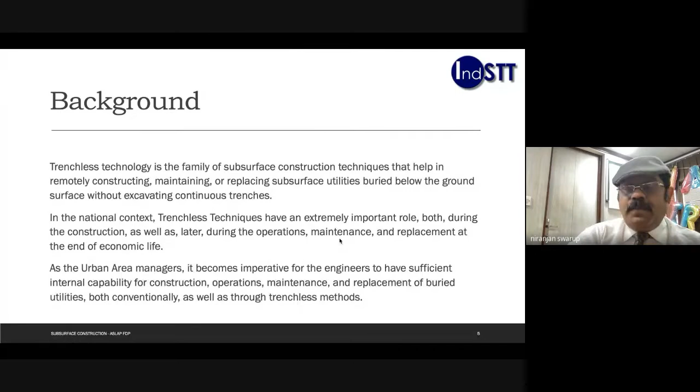In the national context, trenchless techniques have an extremely important role, both during construction as well as later during the operations, maintenance, replacement, and at the end of economic life.

So basically, for the entire life cycle, I have the application of trenchless technology, and we need to understand, or we need to acclimatize our students to adopt those.

As the urban area manager, it becomes imperative for engineers to have sufficient internal capabilities for construction, operations, maintenance, and replacement of buried utilities, both conventionally as well as through trenchless methods.

Through this capacity, the nation would be able to get subsurface utility developed and managed efficiently and effectively. Prerequisite to achieve this capacity is to have proper vision of the application of trenchless technology in the development, maintenance, management of the subsurface utilities, as post-construction management and maintenance of buried utilities through conventional modes may become challenging and even impossible in certain situations.

For capacity creation, we need our academic institutions to see ahead and include systems to cultivate students capable of rendering services for such engineering requirements.

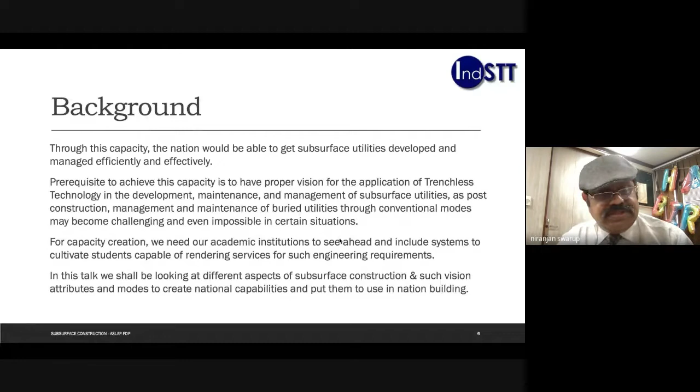In this talk, we shall be looking at different aspects of subsurface construction and such vision attributes and modes to create national capabilities and put them to use in nation building.

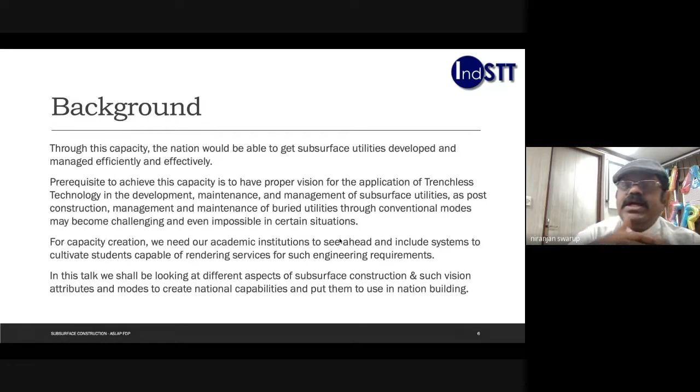So let's move to the basic business. Now, what I'm talking about subsurface space, when I am creating something, the conventional method is to excavate a trench, place my structure or construct my structure, and backfill it.

That basically means I will be damaging my surface, I would be damaging the adjacent structures. Cost and duration of work will be related to the above ground structures and construction. More the denser area, longer the project. Deeper the utility, longer the project.

More utilities buried in the ground, and you have to place your utilities along with them. This brings more complications and a longer, costlier project. Increasing mechanization due to deeper installations is becoming essential today. And if I'm bringing major excavation equipment into a congested city, it becomes impossible to execute.

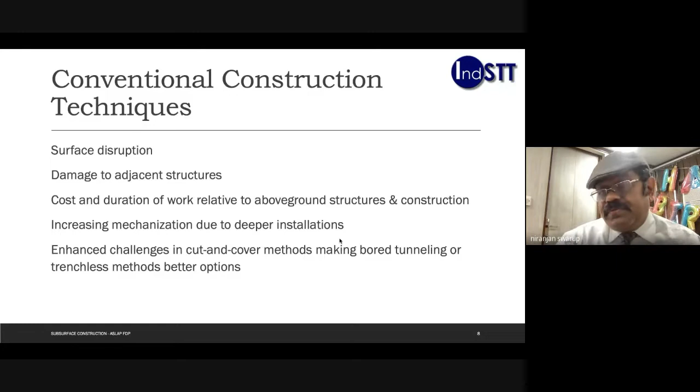These are the conventional construction techniques we face, with enhanced challenges in cut and cover methods, making bored tunneling or trenchless methods the better option. That is what I'm trying to convince all of you, that please think about it, and let's see where my course or curriculum can help my students, or the overall system, apply it.

When I'm talking about a conventional construction method, the problems are that underground space in the public right of way is heavily used. It's extensively used for pipes, cables, everything is buried there. And the traffic congestion is growing exponentially. Every day there are new vehicles sold in India, and those vehicles are going to land up on the urban roads.

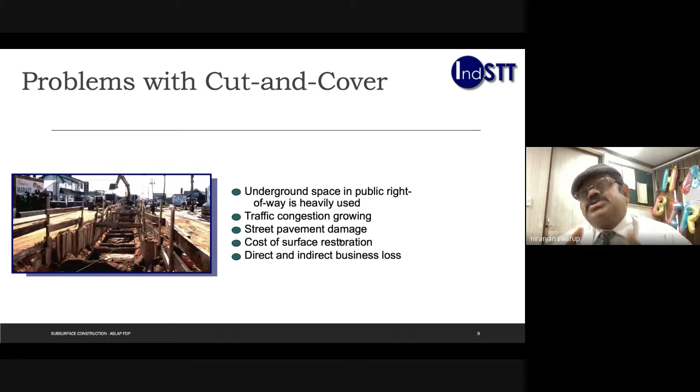The street pavement damages occur when we are talking about excavation. The cost of surface restoration goes up every time, and direct and indirect business losses do come when we are excavating.

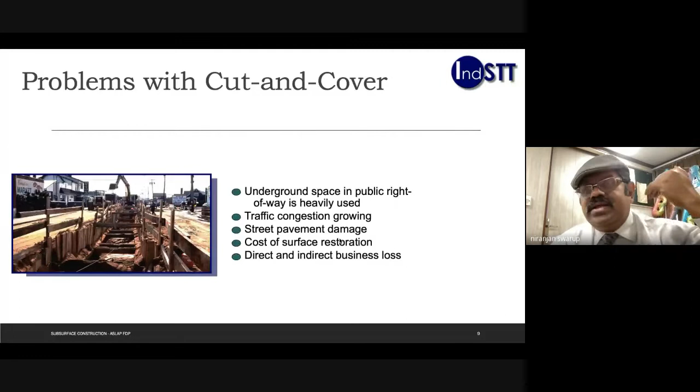So this happens when I'm creating a new utility or new infrastructure, in urban areas or even in cross-country structures where we are constructing pipelines connecting, say, Godavari to Jamnagar. There's a major pipeline connecting the Reliance refinery to the Godavari catchment area, and all those require use of trenchless technology in a big way.

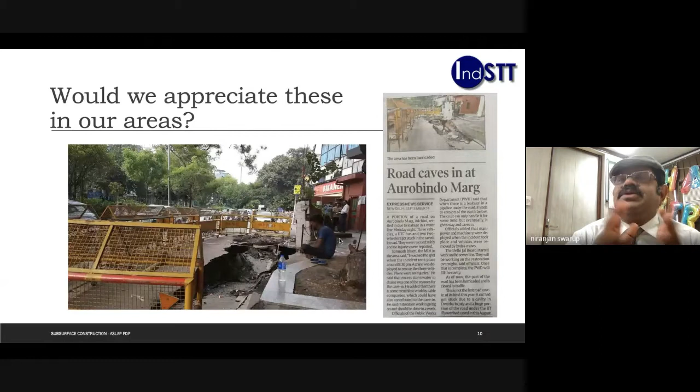Now, I have created my utilities. Then what? Does my utility survive forever? No. This is a picture from Aurobindo Marg last year. You can see the road caved in because of the failure of the pipeline, and the whole structure went down.

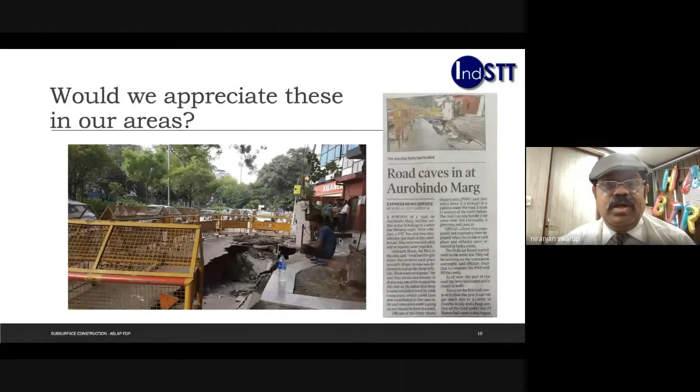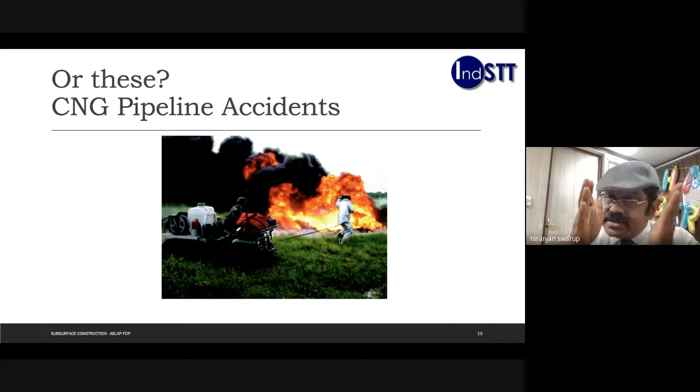And this is something which has now happened a few times, because we are burying CNG or natural gas pipelines all around the city. City gas distribution networks are being created, and this kind of accident is becoming reality now.

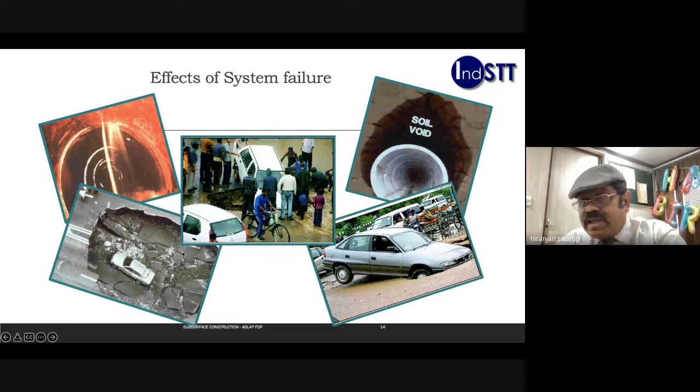Now, what actually happens when you have a buried utility: it will start malfunctioning, and that malfunction will basically create cavities around the utility. When that cavity becomes huge, the load on the surface will basically compact, and the road will cave in, or the structure will cave in, and the roads and everything will go off.

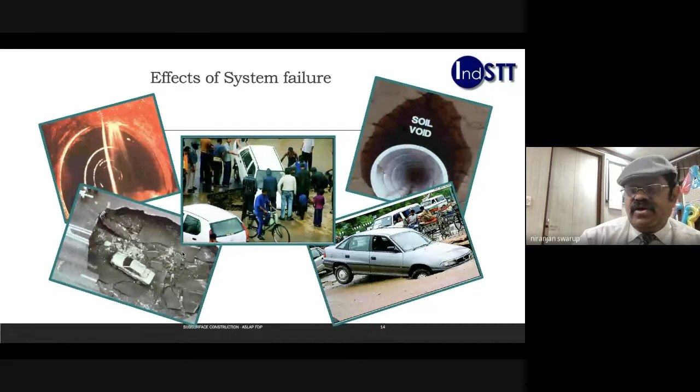So what is needed, or what would be the situation then? The situation would be that we will have to go and repair or rectify all this. So please decide: do we want our subsurface infrastructure built to serve us, or do we continue serving it by creating or repairing it and the appurtenant infrastructure continuously?

Naturally, as an engineer, I would never prefer the second part. I would like my subsurface infrastructure to serve us, and that basically requires application of engineering.

For creating new subsurface infrastructure, we need construction methodologies that reduce open cuts and surface damages while building robust structures. For rehabilitating or repairing subsurface infrastructure, we need construction methodologies that help in using the old subsurface alignment.

When I have used a space, I need to retain that space for the usage of that particular pipeline. That way, any other pipeline can be laid at some other place. In case I don't retain that space, I'll be putting another pipe at another location, and two spaces would be wasted in the subsurface region.

Remember one thing: once you have laid the utility, the next level of utility will be coming below that, then below that, then below that, because the younger the utility, the deeper it has to go.

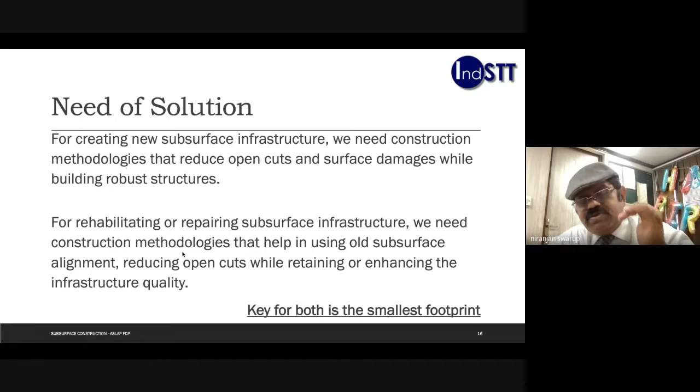And mind it, there are certain services, when we're talking about smart cities or even normal cities, where the levels are frozen because you have discharge locations frozen. So it becomes imperative that you retain the same location. So basically I need methodologies that help in using the old alignments, reducing open cuts while retaining or enhancing the infrastructure quality.

Key to both of these is the smallest footprint, and that is what we achieve through trenchless technology. So let's discuss trenchless technology.

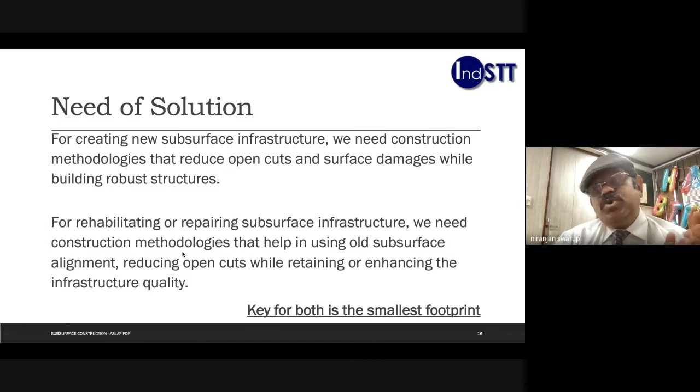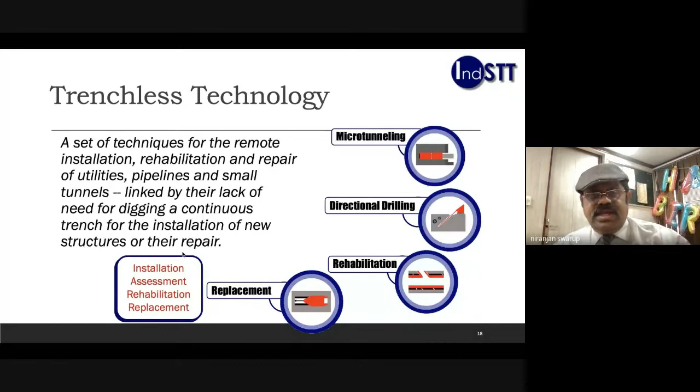It is a set of techniques for the remote installation, rehabilitation, and repair of utilities, pipelines, and small tunnels, linked by their lack of need for digging a continuous trench for the installation of new structures or their repair. So basically, what I do is create a cavity in the ground, or maintain a cavity in the ground, and by creating that cavity, I render certain services to the consumer or to the catchment area, the inhabitants.

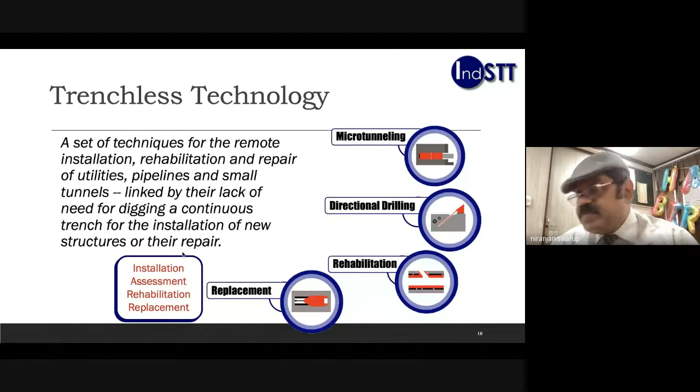So basically, when I'm talking about Trenchless technology, it comprises of 4 branches or fields. One is new installation, second is rehabilitation, third is replacement, and then since we are working in the ground without excavating continuous trenches, we need to see through the ground. That is the 4th segment, where I'm seeing through the ground using certain engineering inputs. These are basically the 4 primary legs of Trenchless technology, which we apply. Now let's look at these legs one by one.

When I'm talking about new installation techniques, what I mean to say is I'm creating a cavity in the ground. I can do this by shifting the soil sideways, I can cut the soil and actually remove it, or I can do fluid assisted boring, where a fluid or a mechanical device cuts and breaks the ground, and the excavated material is removed by the circulating fluid. So these are primarily 3 major cavity creating methodologies, and that understanding will help us see where we can apply the basic engineering in this.

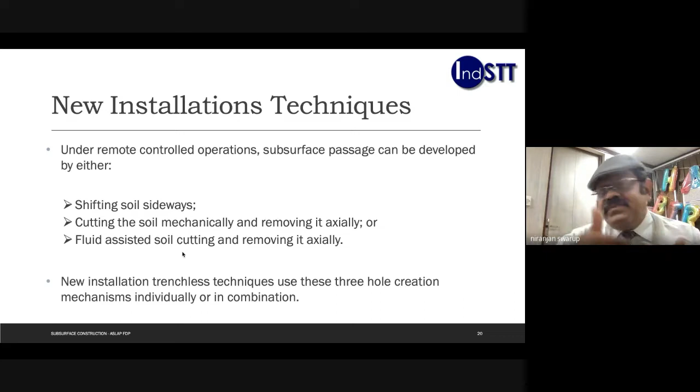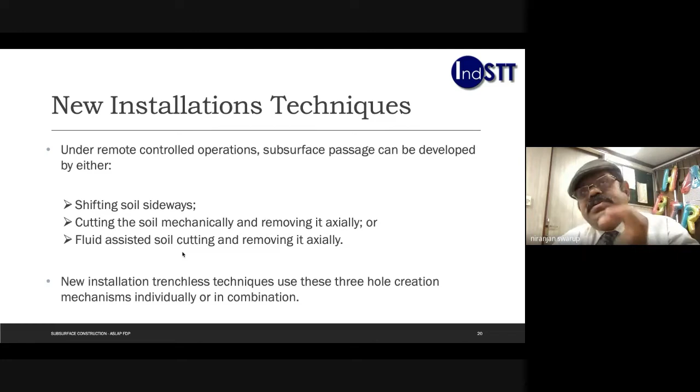So now we created the cavity. The cavity on its own will not survive, we need to provide some wall, and that wall is basically the pipe or structure which we are placing there. This pipe or structure would be deteriorating over a period of time, and I need to arrest its failure process. So what would I do? I would basically plug the leaks in the beginning, as we see that if the leaks are there, it will permit the soil to cave in or get inside the pipe, and it will in turn damage the whole surface.

So I will plug the leak, or the second stage of the damage would be where I would be inserting a leak-proof membrane which prevents the fluid from flowing in, but does not give any structural strength to my pipe or structure. The third one, where my structure has become completely weak, I would be inserting a load-bearing liner which will take the load and retain the whole space. So these are the three primary rehabilitation modes on which different methodologies are created and applied.

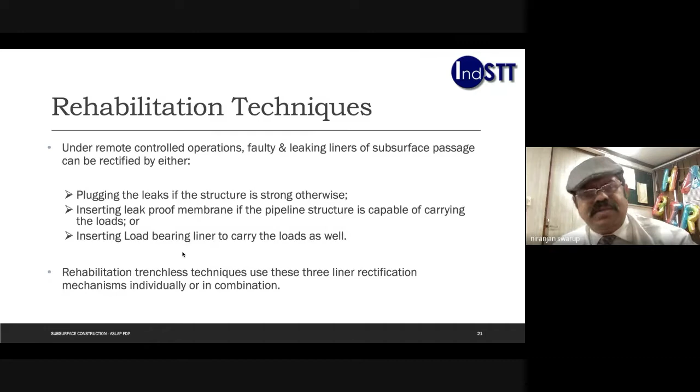There are many methodologies and methods in all of these systems, and they are developed to suit a specific need or requirement. If I'm talking about any place or any utility which has alignment and grade control, there are specific equipment and methodologies which have to be used so that the structures are robust and usable.

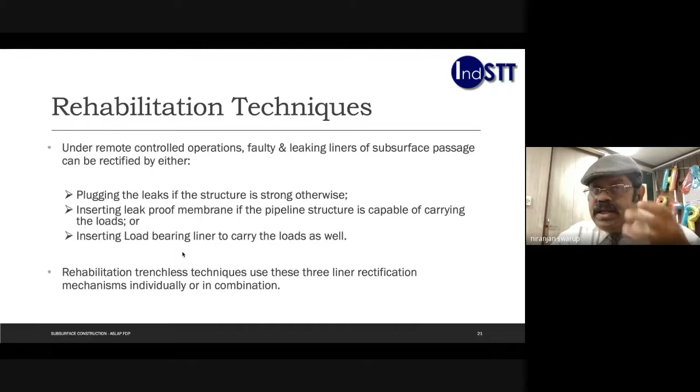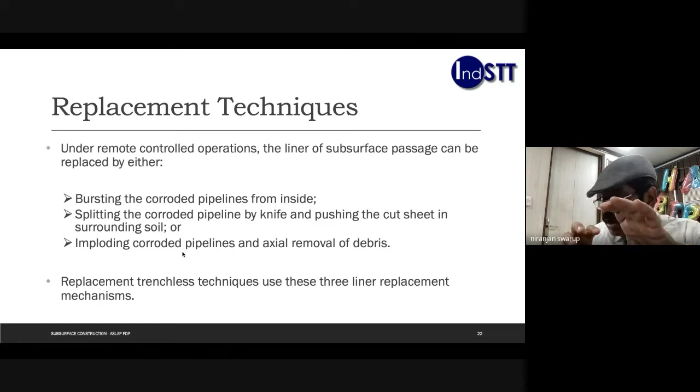Now, I did rehabilitation. The last stage would be where the utility is unable to survive, and it would become more practical if I replace the liner. How do I replace that? I burst the corroded liner from inside. I insert a cone, and that cone has a larger diameter than the existing pipe. So it crushes the pipe, and the pipe is pushed out, and the cavity space created behind it is filled up by the new pipe being pulled in.

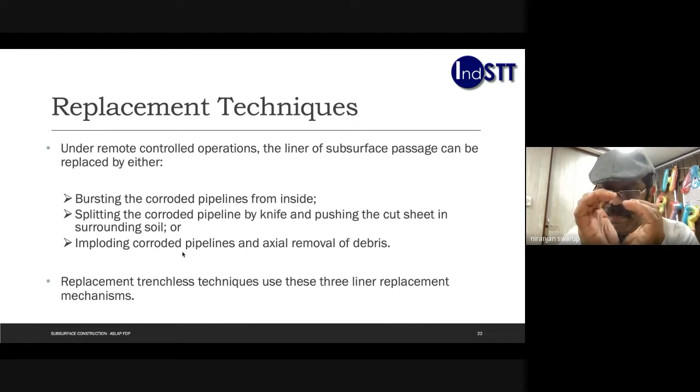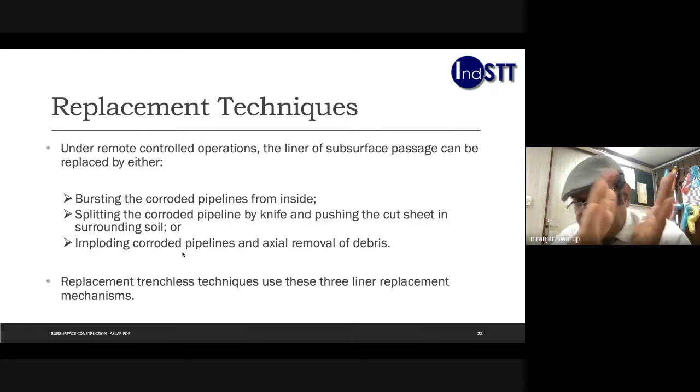Or I can run a knife through it. The knife will cut the pipe, and naturally behind it, the new pipe will be pulled in. This is done generally for the metallic pipes which are ductile, and cracking them is not easy. Or I can do imploding, where I practically break the pipe and remove the material axially. So these are the three primary pipe replacement methodologies by which I can remove a buried pipe and place a new pipe therein and use it continuously.

Now, then comes seeing through the ground. This means that under remote controlled operation, the subsurface information has to be gathered. If it is not available, there is a chance that we may go and damage or destroy the existing structures. To avoid that, we require the status of the buried pipeline, the status of the geophysical facts in the ground, and the pipeline condition information.

Now, status of the buried pipeline means that you would find out at what location, at what XYZ coordinates, the pipeline structure is existing. That is done by applying certain geophysical methodologies, and in addition, certain protocols called subsurface utility engineering help you identify and designate a specific pipe where it is buried, and based on that information, the works are done.

Then comes the geophysical information, where you need to know what is the soil strata, what is the quality of soil, based on which you will select the equipment, you will select the fluids or cutting liquids, and you will select the other complements like downhole tools and everything.

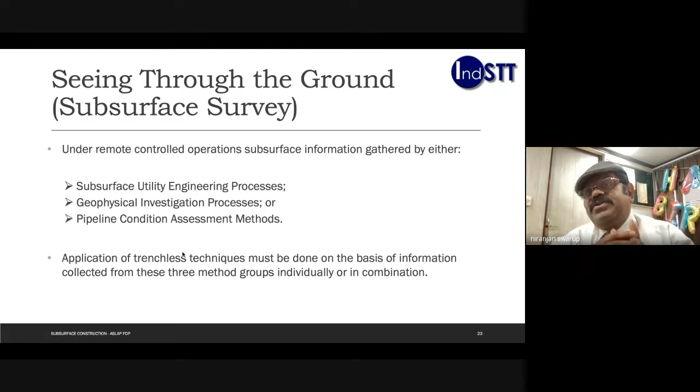So application of trenchless techniques must be done based on information gathered from these three segments. The first two refer to new installation. The third refers to pipeline condition assessment, which relates to rehabilitation and replacement of pipelines. In isolation or in combination, these methodologies are applied to see through the ground, or subsurface survey is done.

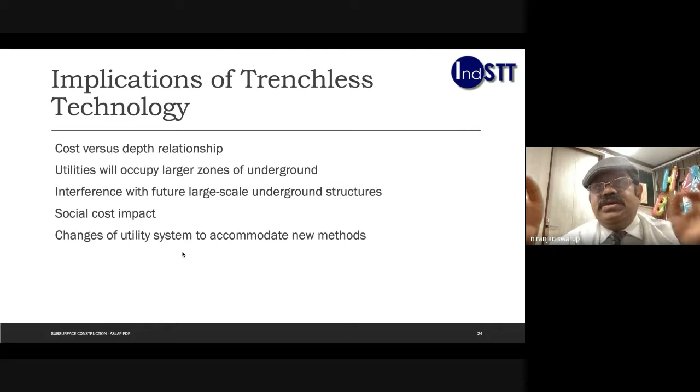Now the implications are, as I indicated, the deeper you go, the cost goes up, the time goes up, your damages go up — all those things when going for open cut excavation. But when using trenchless technology, your entry location is defined, your exit location is defined, and the other sections are not excavated. So your cost is not very connected with the existing depth. You can lay the pipe at one depth or another depth and probably end up with the same cost and same timeline.

Now remember, when we talk about trenchless technology, we are avoiding all the buried utilities. We know this by running the subsurface utility engineering protocol, which tells us where pipelines, cables, or structures are buried, and defines where we can lay our new pipes or structures. That is helpful if I'm going for trenchless technology. If I don't, I need to excavate everything, expose everything, and risk damaging them.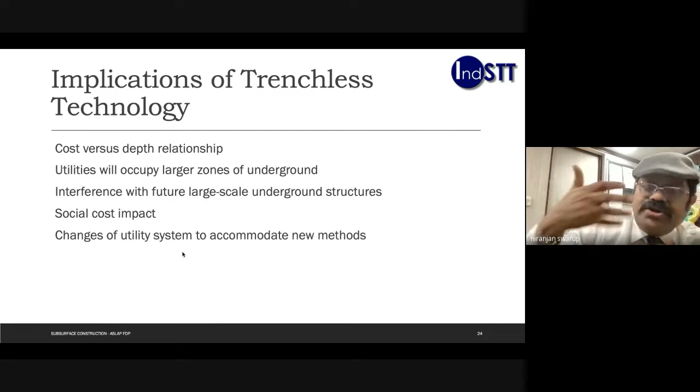Then comes large scale structures in future. Let's say you build one tunnel in the city, and tomorrow you want to build another tunnel below that. There would be challenges, because when the second tunnel is built at that level, the first tunnel could be destroyed or damaged. This also is avoided by trenchless technology.

Then comes social cost impact. If you're applying trenchless technology, you are not damaging anything on the surface for most of the project length, so the social cost is the least. If you are excavating a trench on the road, naturally there will be diversions, losses of business, gases and excavated material — like parali burning brings Delhi a very bad gas chamber situation. All those can be avoided if you go for trenchless technology.

And then you can change the utility systems to accommodate new methods, especially when building smart cities — you require sensors to be placed, you require Internet of Things, and those inputs are very easily achieved by trenchless technology application. Most smart cities are utilizing trenchless technology, and I'm trying to convince all of you that please train your students in these fields so that boys and girls get engagement with those smart city SPVs or their contractors. And mind it, this business is going to survive till the smart city survives, so obviously it's a long-term goal.

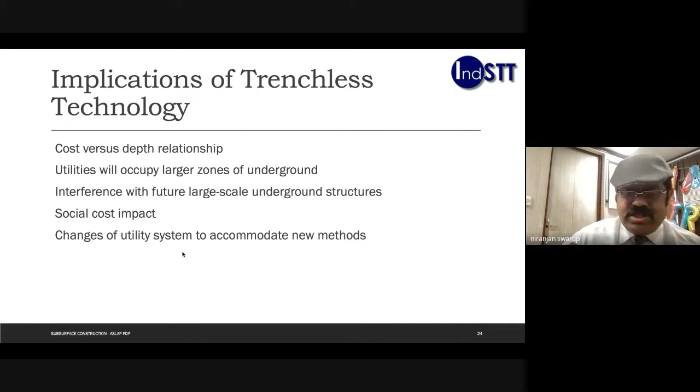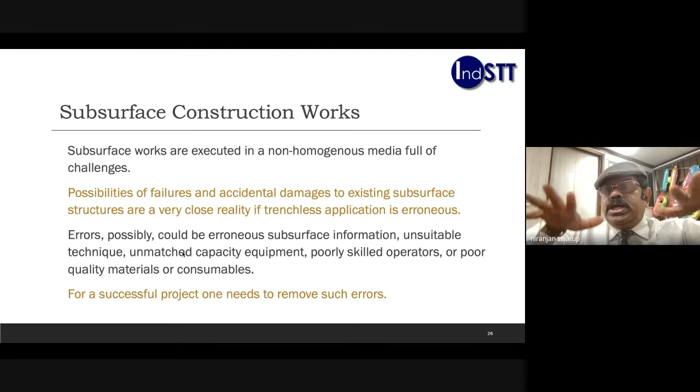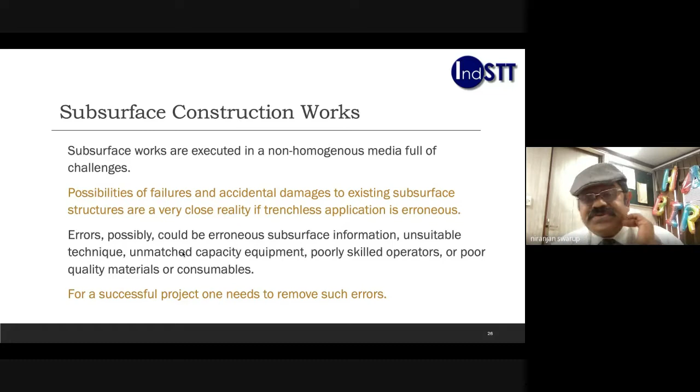So let's look at subsurface constructions, the engineering part. The subsurface works are executed in a non-homogeneous media full of challenges. Possibilities of failures and accidental damages to existing subsurface structures are a very close reality if trenchless application is erroneous. Errors possibly could be erroneous subsurface information, unsuitable technique, unmatched capacity equipment, poorly skilled operators, or poor quality material or consumables. For a successful project, one needs to remove such errors, and that is where the role of the professor comes in.

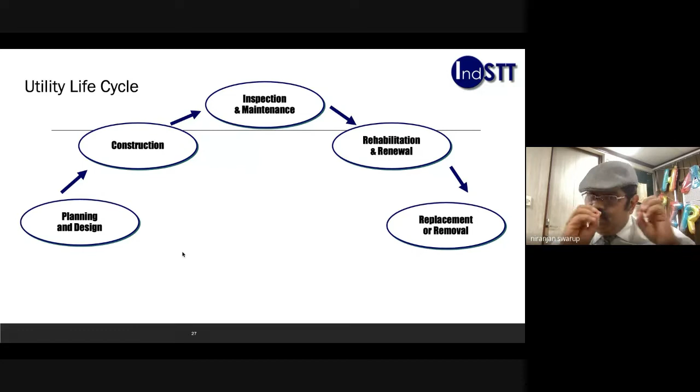Let's look briefly at the life cycle of a utility. You plan and design, you construct, you inspect and maintain, you rehabilitate or renew, and then you replace or remove. So if I look at that, it will be new installation, rehabilitation and replacement, seeing through the ground, and life cycle data management — these are the four pillars on which this whole utility life cycle survives.

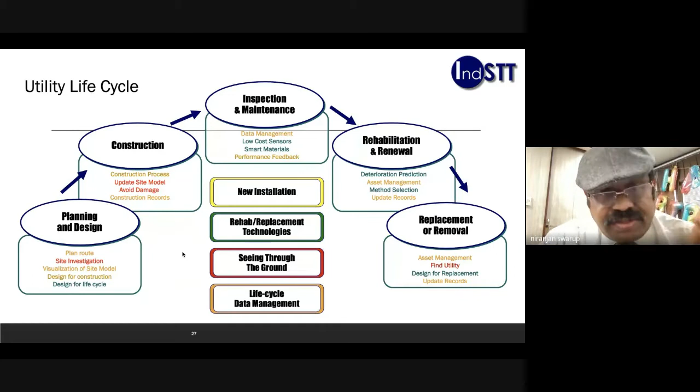When you're planning, you plan the route, do the site investigation, visualize the site model, design for construction, and design for the life cycle. When you are constructing, it's the construction process, updating the site model made in the previous stage, avoiding damages, and creating construction records — those should be ABD, as-built drawings. Then comes inspection and maintenance, where the data is managed, the ABDs, the quality of material, the joints and everything are defined.

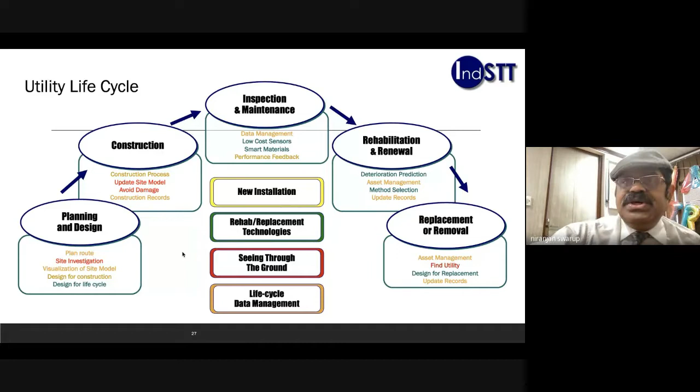You have low-cost sensors installed, you have smart materials which work based on the need, and then there's performance feedback that comes in saying this pipeline is going to fail over a period of 2 years, so get your things rectified now. That kind of proactive approach is quite essential for smart cities, and obviously our engineers have to be trained accordingly.

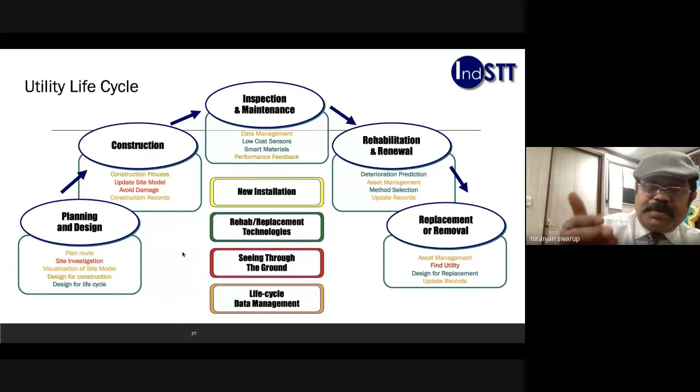Then comes rehabilitation and renewal, where the deterioration prediction is done. You do the asset management, select a specific method for how you are going to rectify the failures or the rehabilitation jobs, and then update the records, because the moment you strengthen it, its quality would go up, and that would supersede your construction records made in the second stage.

When the utility is at the end of its life, you do the management like finding the utilities, because you would be aware that if you go around any urban area, the utilities built 10 or 20 years back are already buried below the ground and more structures have been built over it. Finding those utilities itself is a challenge. So finding utilities, design for replacement, and updating the record.

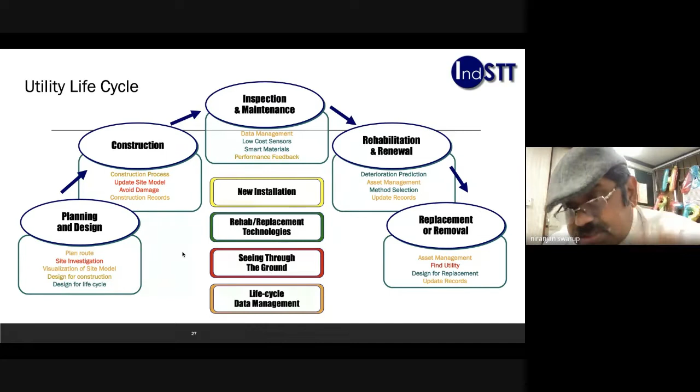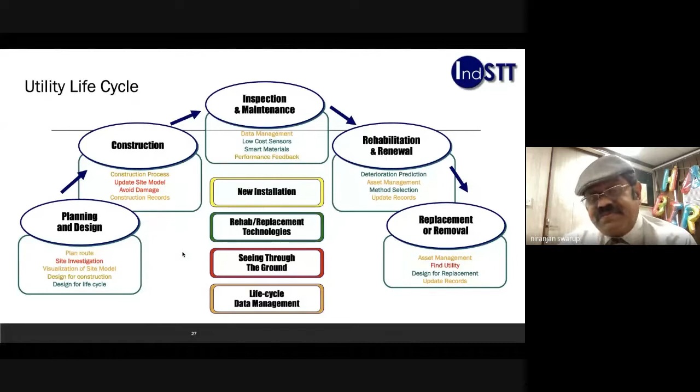So these are all part of the activities which somebody managing or constructing subsurface infrastructure has to perform. Please think about your line of business. If you are a computer engineer, or you are teaching somebody computer science, there are codes you can write for any of these activities, and systems you can develop for data management, data gathering, designation.

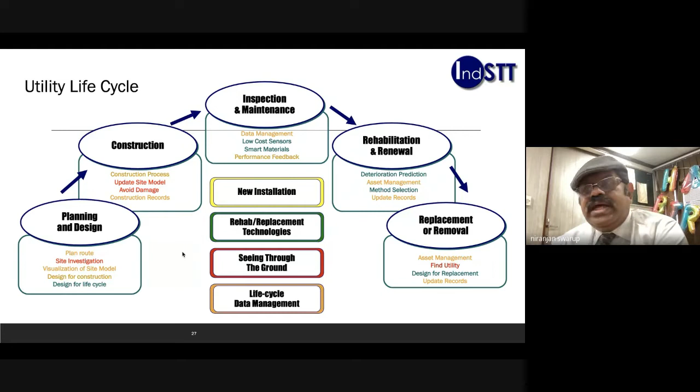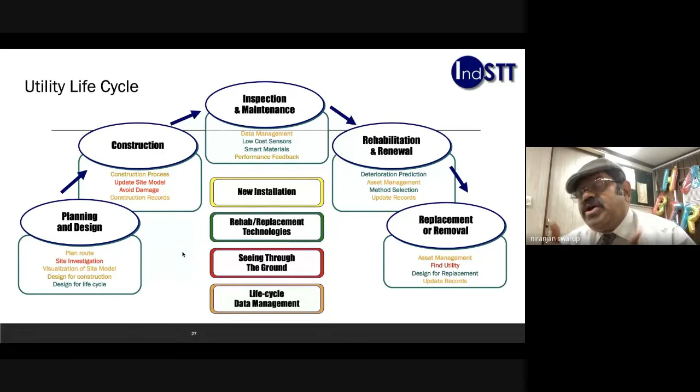There's, let's say, a CCTV camera. Once it is running inside a city like Delhi, the pipelines created here are more than 9,000 kilometers if I add everything in one place. So now 9,000 kilometers of data is huge data which has to be managed or understood, so that failures are avoided at the latest stage of its operation. So all those things come in.

You think of your branch, and there is a major role of that particular branch in this field.

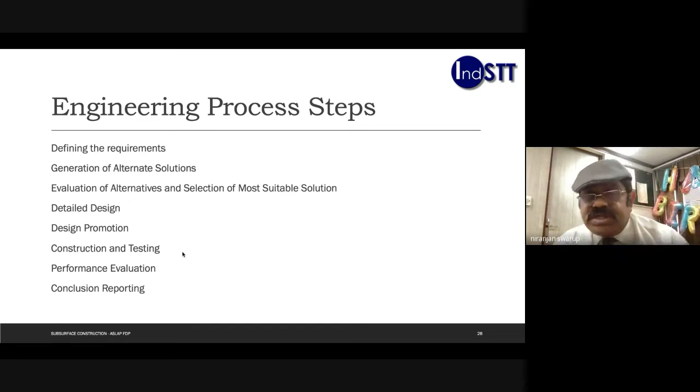Now, what is the engineering process generally applied? You define the requirement, generate alternative solutions, evaluate the alternatives and select the most suitable solution, perform the detailed design, promote the design so that it is accepted or approved, construct and test, performance evaluation is done, and then finally conclusion reporting. So this is the basic engineering process of this life cycle we are talking about.

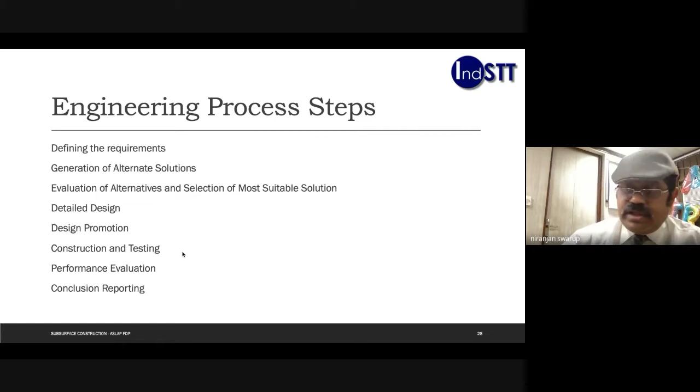Now what happens here is there are geotechnical issues which cloud the subsurface construction. It is a challenging business, and that is why we require educated boys and girls who can understand the primary challenges. The jobs are uncertain.

If you are aware, in Kolkata, in Bowbazar, the Kolkata Metro was laying the line, and the machine, which was about 6 meter diameter, punctured a water body, and the water flooded the whole tunnel. It was a catastrophic problem. So all those things give uncertainty to the business, and that is a very expected thing.

And here comes the decision-making skills of our engineers, who can really understand that if they are applying something, what could be the outcome. The conditions which have been defined could change, because that water body, in the example I gave you, was not known. In the contract, they thought it was solid soil, and they just went on tunneling, and then they got the water.

You need appropriate expertise and timing, because these are processes where you are creating utilities below the ground. You have to do non-stop working. The moment you stop it, the project will go into suspension, and if the project stops, inertia is going to spoil the whole process. So you have to have proper expertise in the whole process, number one, and then run it in a way that the project is successfully concluded.

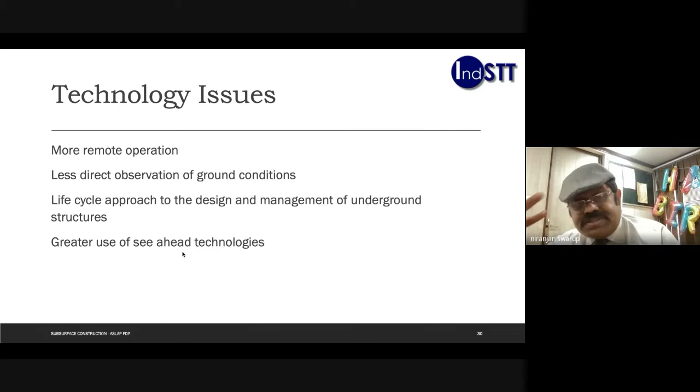Subsurface construction and trenchless. Trenchless technology applications are remotely operated, smart construction processes that are extremely useful for creating, maintaining, and managing subsurface utilities without excavating continuous trenches. Through this feature, surface and subsurface infrastructure destruction in urban areas can be avoided during construction. In addition, positioning processes and systems of these techniques help in creating a correct as-built database of the buried utilities, providing valuable inputs for future maintenance works of the subsurface utilities.

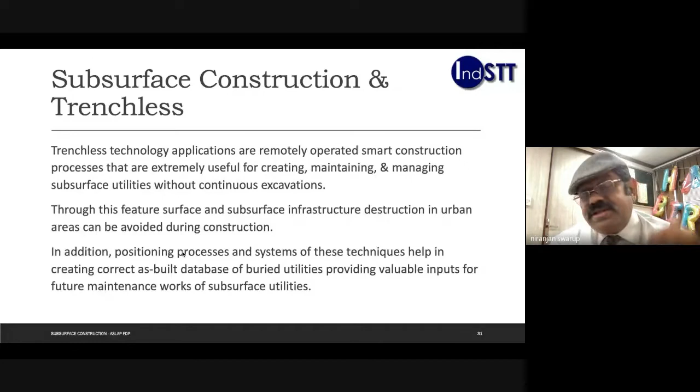That Internet of Things, which I'm speaking of for smart cities, is created from this information. Utilities like water supply, drainage, power and telecom lines, petrochemical and gas transmission and distribution networks are commonly buried below the ground surface. Historically, these have been laid by conventional open-cut processes. With enhanced density of subsurface networks, trenchless techniques are becoming the preferred construction process, because you cannot go on excavating open cuts, open trenches and laying your utilities forever. There will be a limitation when your existing pipelines come.

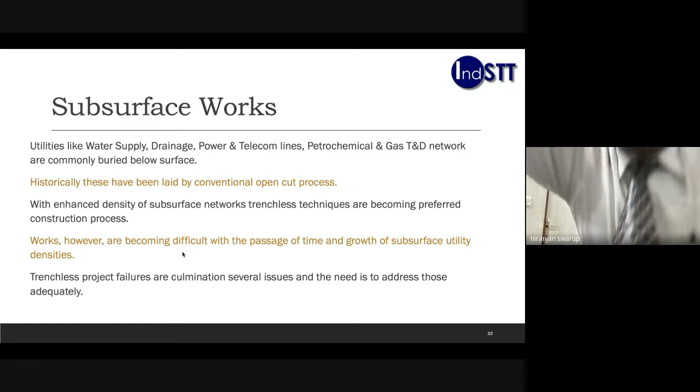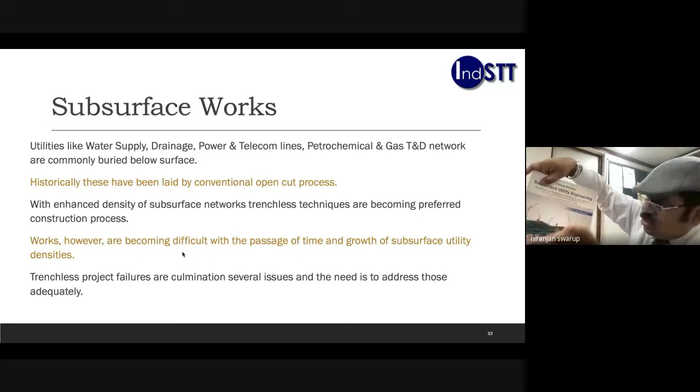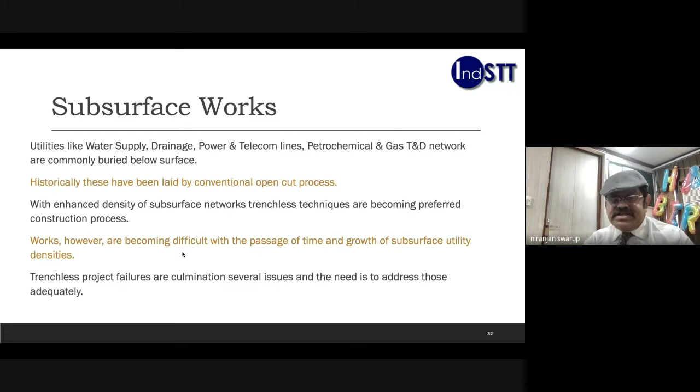You can look at the brochure of one of the programs that we conducted. You can see these are the electrical poles on the road and these are the utilities buried below the ground. Now, if you have to lay another utility below it, it will be a bigger challenge. So anyway, this is something which has to be addressed. Works, however, are becoming difficult with the passage of time and growth of subsurface utility densities. Trenchless project failures are a culmination of several issues, and the need is to address those adequately.

Now, let's look at the anatomy of failure. The failure can happen if I select an inadequate or improper technique. There are several trenchless techniques, and you can choose any of them. But if it is not suitable, you will end up in a failure. Inadequate site and/or soil investigations. Inaccurate subsurface interpretation. You will be running, let's say, ground penetrating radar. Now, this radar sends radio frequency signals down, which get reflected, and this passage is measured in nanoseconds or whatever the units may be.

Now, this time lag will depend on the dielectric constant or different characteristics of your soil, and that will alter the depth measured, or give you erroneous depth. So subsurface interpretation is something which has to be very clear, and the boys and girls have to know that. Unforeseen ground conditions are there because, as I explained previously, another possibility is that while you are creating a cavity, you go and get inside the existing pipeline.

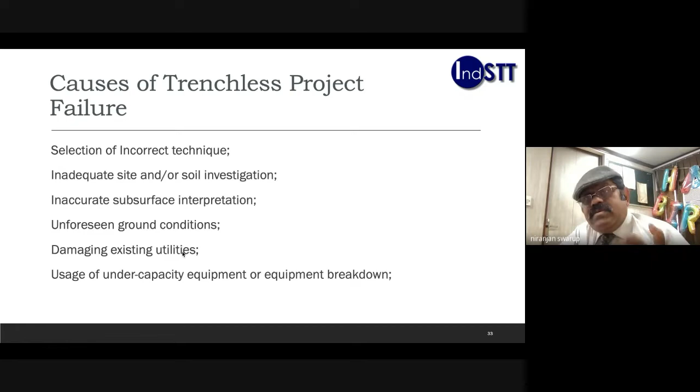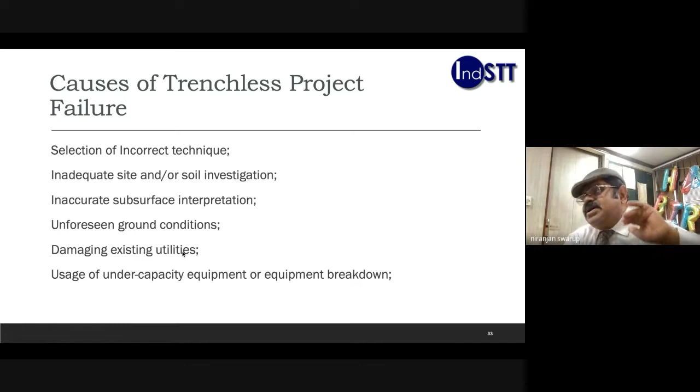There has been a case during the Commonwealth Games in New Delhi in which one pipeline on one road was collapsing one by one. In one month, it collapsed 10 times, because the people who were laying HDD lines were simply drilling through the sewer line, creating a hole, putting their cables and going away. Later, when the monsoon came, because of the water pressure, the pipeline collapsed at one location after another. This went on happening. That ended up with the utility having to be excavated and repaired everywhere.

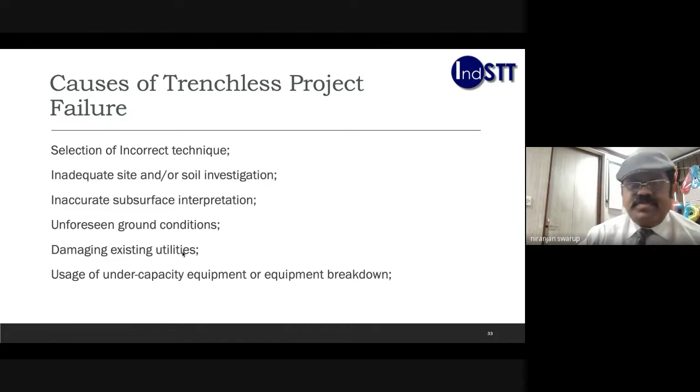Usage of under-capacity equipment or equipment breakdown. These are something which we need to cultivate in our boys and girls, that they have to understand the project requirement and based on that select the proper equipment. Inadequate temporary works. When I'm doing my project work, there are primary needs of temporary works, and if I don't do them properly, the project can fail. Installation of inappropriate or weak materials. It's a very understandable statement. Failure to adhere to the work or material specifications.

There are specifications which have been created for trenchless technology. IndSTT has published those. I've been the secretary for the code formation committee, and we have published 7 codes. We expect to release another code in April when we hold the NoDig India conference on 8th April. So that will be the 8th code coming in. And then finally, inappropriate or bad workmanship. If the proper work is not done, and you allow bad or unskilled operators to run the machine, you are going to end up in a troubled project.

Mind it, a tunnel boring machine, a TBM, requires specialists or operators who are having a master's degree in engineering. MTechs are generally employed for running the TBMs. The BTechs generally are taken in for installing, or rather, smaller machines. So that is the level of information and level of knowledge which is needed.

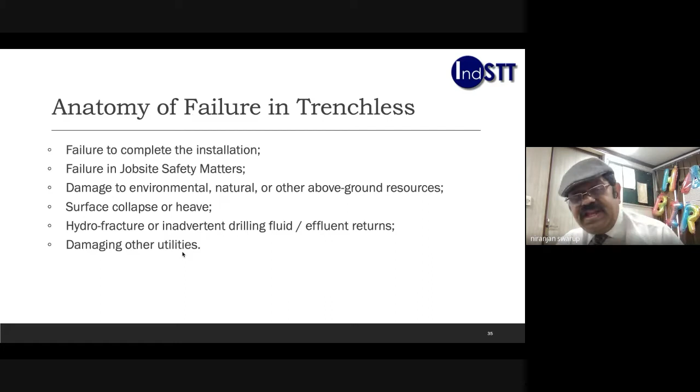And what are the reasons behind it? When I'm drilling, there is a fluid which I'm pumping in, and that fluid is lost. The fluid will not be bringing anything back, and the pipeline will collapse. There can be obstructions in front of it. There can be hydrolock, where pressures are getting created. So we need to design the fluid in a way that hydrolocks are not created. Line and grade failures are there.

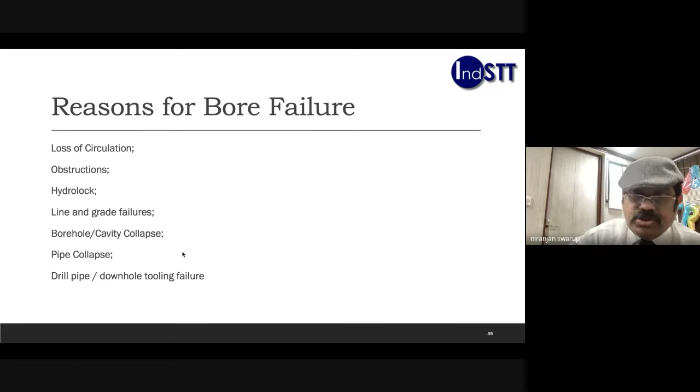Let's say I have to create a pipeline at a specific depth and alignment. I apply a machine which is not capable of doing that. The result would be a pipeline created like this, and it won't drain off anything if you want a gravity flow pipeline. You can have borehole or cavity collapse. You can have pipe collapse. You can have drill pipe or downhole tooling failure. So all those things lead to more failures.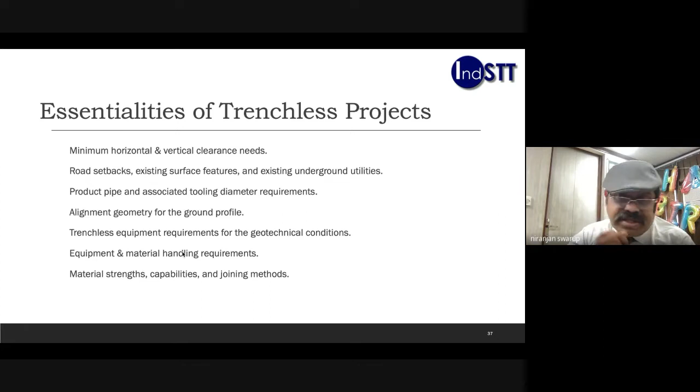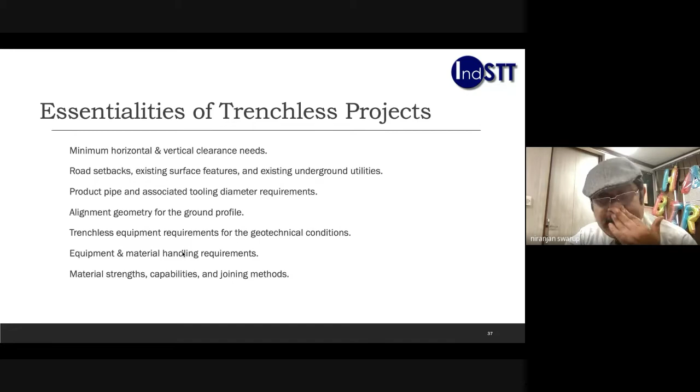The product pipe and associated tooling diameter requirements have to be understood. Alignment geometry for the ground profile has to be known. Trenchless equipment requirements for the geotechnical conditions need to be understood, and based on that understanding, the equipment has to be sourced or applied at the site. Equipment and material handling requirements have to be defined, and material strengths, capabilities, and joining methods. All these things require understanding of various engineering fields. We have to have that understanding in our boys and girls.

The critical inputs for a trenchless project are trenchless attributes, required attributes of the executing agency, technology selection, execution plans, third-party inspection, challenges in new installations, liners, and pipe bursting. So these are the critical inputs which are essential, which have to be understood if my project has to succeed.

Attributes of trenchless means these are basically specialized in nature. These are not run-of-the-mill works. The technique selection has to be very clear and precise so that you don't end up creating a poorly constructed or poorly repaired utility. Operator skills are an essential part of it, where your role comes in. You have to be teaching your boys and girls how to do the planning, the design, the execution, the reporting, and the as-built drawing preparation. So all those things do come in.

You have to have suitable equipment meeting the project and site requirements. The installed materials have to be properly selected. Technique-related limitations are always there, and every limitation has to be understood, and based on that, decisions have to be taken. Proper subsurface data is one of the essentialities. And finally, the impact of surrounding structures also has an effect. Let's say you are working close to a retaining wall. This can make your job challenging. So all those things have to be understood by the boys and girls.

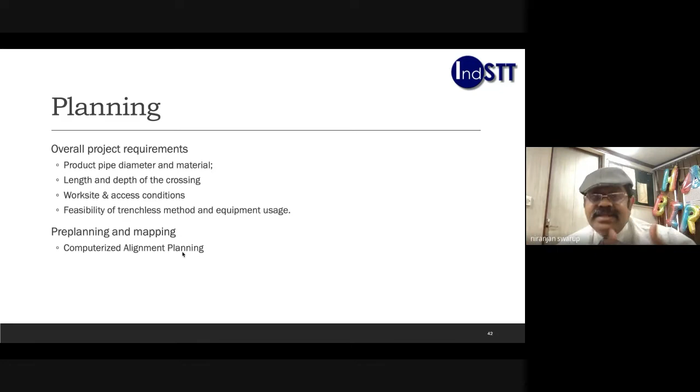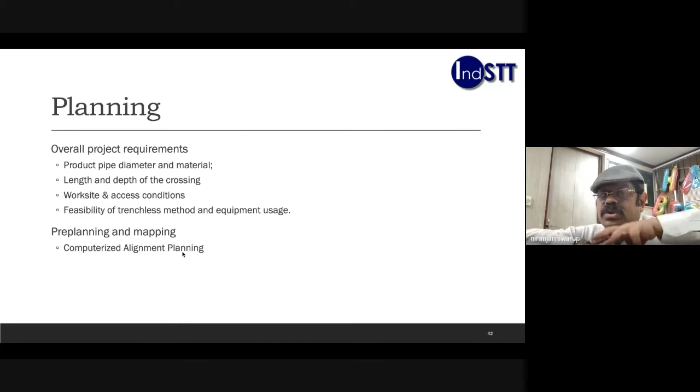When I'm talking about planning, planning means I need to understand the overall project requirement, product pipe, diameter and material, length and depth of the crossing, work site and access conditions, feasibility of trenchless method and equipment usage. Then comes pre-planning and mapping, where I will do the computerized alignment planning. How am I going to lay my structure?

When I'm talking about job site safety, it depends on the operator skills, safety, health and environment issues, job site inspection and briefings, overhead structures, underground structures and appurtenances, trenchless and allied equipment safety, and electrical strikes. Because we are working below the ground, there are chances that my machine can go and hit a power cable or a gas line or anything. So those are the job site safety issues which my boys and girls have to know.

Directions for project planning and execution. The basic trenchless project considerations have to be inculcated within them. The pipe path alignment considerations have to be told. Directional accuracy and tolerances evaluation, they should know. The product pipe considerations, what are to be used, that they should know. The stress considerations they should know, and as-built drawing considerations are another essentiality.

When I'm talking about performance standards: equipment operations, safety during the work, working drawings and sketches, compliant execution. Whatever we have drawn, the installation or construction has to follow that particular methodology and the drawings and the directions. Appropriate use of equipment and tooling, machine operating procedures and sequencing, meeting the minimum qualifying competency standards for the operators. So these standards are there.

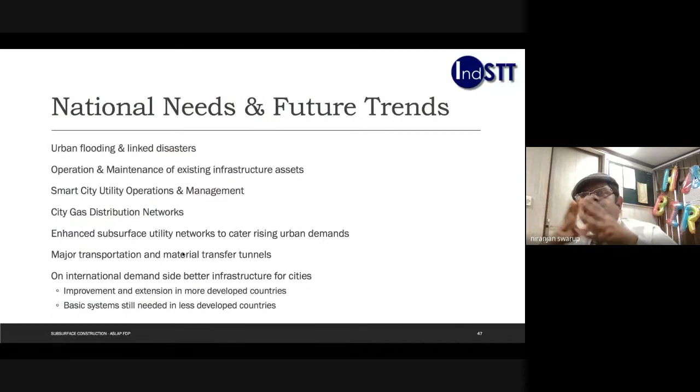Then comes the international market. Most of the developing nations are now applying trenchless technology, and the boys and girls who were trained under IndSTT, many of them are now serving international markets. I would propose to enhance this overseas job-getting situation. Please think about your students - if they are able to get some employment in Philippines, some employment in Saudi, some employment in Africa, South Africa and so on, they would be having a very good life.

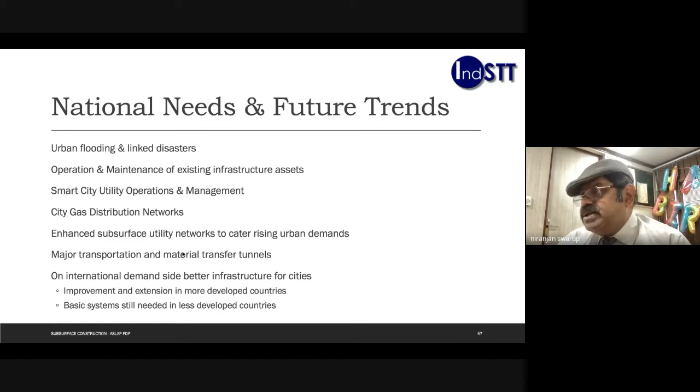Mind it, some years back we used to get overseas operators and specialists to come and work in India. So we have cultivated people, but we want to make it institutionalized, and that is my proposition: improvement and extension in more developed countries is one direction, and basic systems creation in the less developed countries. So these are the international applications.

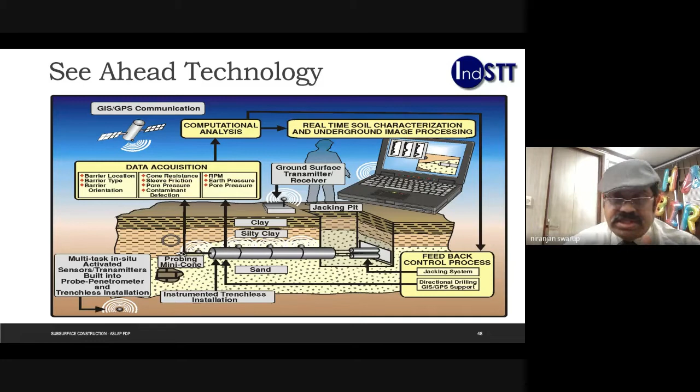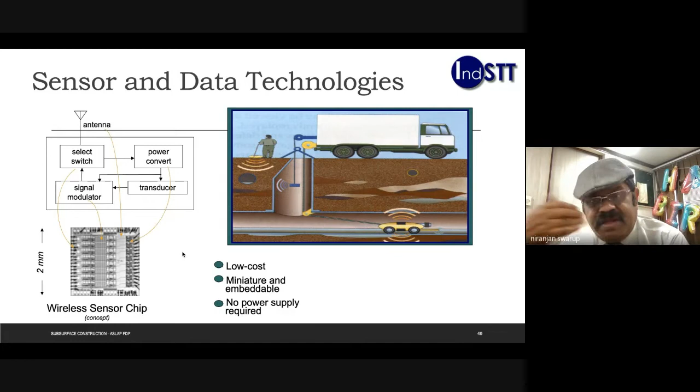Now when I'm talking about see-ahead technologies, this is what I meant. You have GIS and GPS communication, you have different kinds of information being gathered and maintained, and IoT is created. There are sensors and data technologies for rehabilitation. These are all available, and if you search, you will find many things available which you can teach or train your students. Now what is going to be the impact of those demands and needs?

The increased market for underground construction is getting developed. There's increased imperative for professionals to be more involved in underground space user issues, and new geo-related research and technology development opportunities are coming up, which, please appreciate, has to be addressed by people like you.

Say you are teaching or working in a city which is a C level city or B level city. Now all utility owners - let's say PWD or municipal corporation or whatever - they would not have the possibility of accessing, let's say, IITs for design. A common feature has been for metros, where courts have been giving orders that, okay, you go and talk to this IIT and get the design done. Why can't your college do that design?

And if your college can do that design, naturally you would be teaching students, you would be earning resources, you would be earning money for the institution as well as for yourself. You'll be creating infrastructure for your engineering college, and that infrastructure will naturally help in creating better professionals in the market.

So the way forward is: subsurface construction requires adequate application of engineering inputs. Each subsurface project is different and needs to be planned, designed, and executed to suit the site requirements. Some of the important engineering inputs include specifications, contract conditions, schedule of rates, standard operating procedures, method statements, subsurface utility engineering codes, project supervision, code of practice for directional drilling, operator competency standards, and so on.

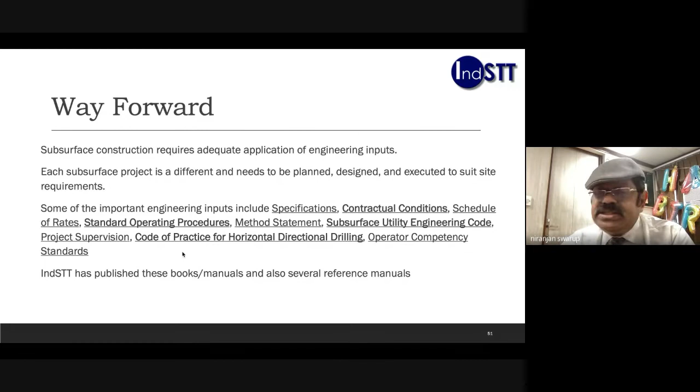IndSTT has published these books and manuals, and also several reference manuals - about 40 odd different editions - and they can be applied. My invitation to all of you is to please have a look at those proper project execution guides. Have a look at our website. There are several IndSTT training programs to overcome different challenges and cultivate operator or engineer skills.

Practicing engineering professionals can enhance their skills and that way enhance their prospects. Students and entry-level engineers could benefit immensely by learning the technology nuances. The utility system owners can get great help in adoption of these technologies by developing their own capacities with the help of IndSTT and your colleges.

If you are living in any city, whichever municipal authority is working there, contact them, get in touch with them, and assist them in creating, maintaining, and managing their utilities. It's a win-win situation for everybody, and we will be holding your hand to go ahead. To initiate the actions at the grassroots, we need to develop systems for creating professionals having sufficient understanding of trenchless systems.

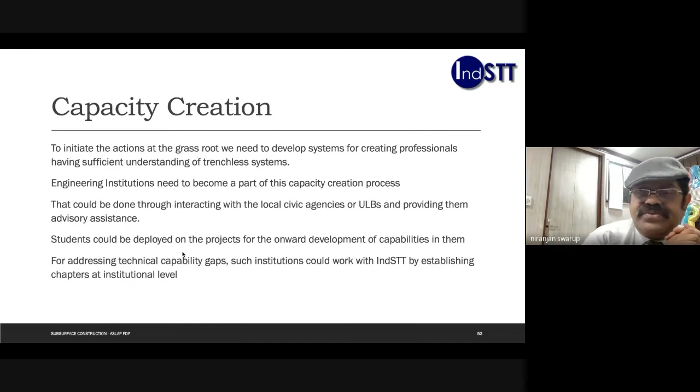Engineering institutes or institutions need to become a part of this capacity creation process. That could be done through interacting with local civic agencies and ULBs, urban local bodies, and providing them advisory assistance. Students could be deployed on the project for onward development of capabilities in them.

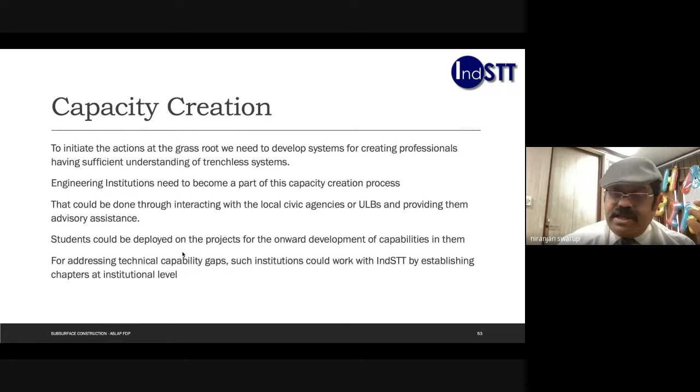For addressing technical capability gaps, such institutions could work with us by establishing chapters at institutional level. What we can provide you is INDSTT publications, other trenchless publications from the world over, our inputs, our member network who can work with you, our training programs, and other trenchless training programs from the world over. We have a global network, and on that, several training programs are conducted. You have that access.

We do conduct No-Dig India shows. The next one, or the closest one, is the No-Dig India Conference happening on 8th April. I would invite all of you to consider coming and participating, so that you would know what this business is all about, creating INDSTT chapters where we work and handhold your systems.

So with this, I'm coming to the end of my presentation. The concluding remarks are: trenchless technologies offer an effective tool for subsurface construction activities. Due to aging infrastructure and explosive demands, the nation will need to develop and enhance its trenchless capacities. Trenchless capacity enhancement needs to address each type of stakeholder involved in the project delivery chain.

You have people who are developing the equipment, people developing the materials, people developing the cutting tools or operating tools, pipelines like for rehabilitation, where there are special types of pipes which are created. You have data management systems. All those need to be created.

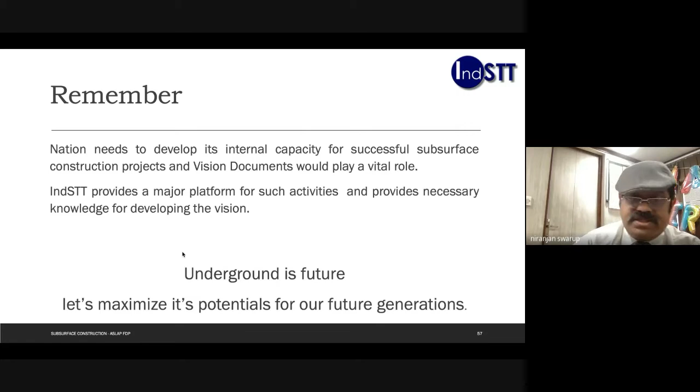Remember, the nation needs to develop its internal capacity for successful subsurface construction projects, and vision documents would play a vital role. INDSTT provides a major platform for such activities and provides necessary knowledge for developing this vision. Underground is the future. Let's maximize its potential for our future generations. Thank you very much. This presentation will be available to all of you once I conclude it.

So I think my presentation is gone. Now we are on the screen. So let's have some...

Discussion or comments from the audience. Does anybody have any question or wants to have some clarification? No reactions? Everybody has understood everything? If yes, when are we going to start this Trenchless chapter in your college? If you don't react, how would I know? Everybody is mute. Nobody has unmuted yet.